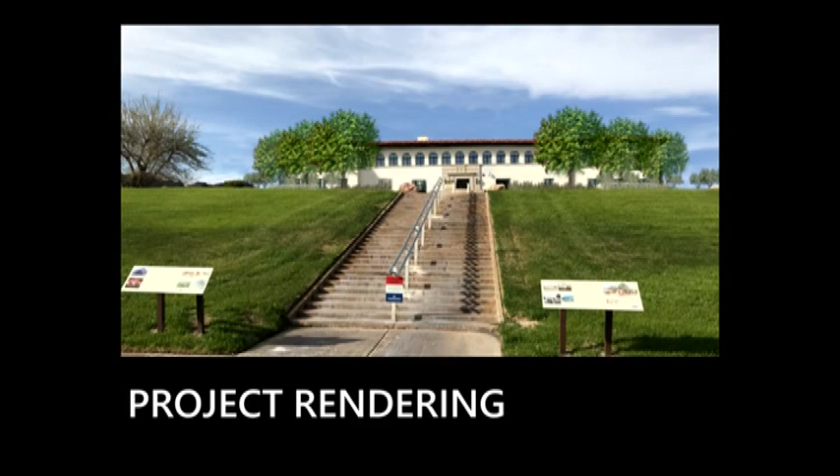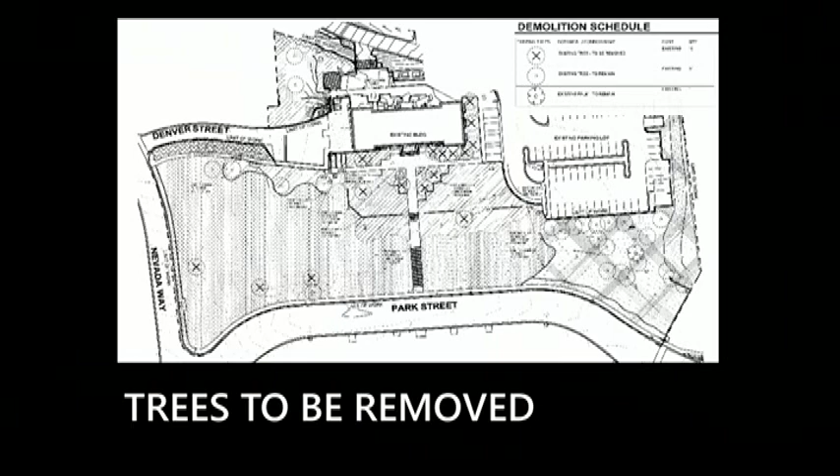Next slide. Here you can see where the new trees will be planted. Like we mentioned earlier, the pistache trees will be planted near the main entrance. Shade-producing Chinese elm trees will be planted along Nevada Way, between the existing mulberry trees along Denver Street, along that service entrance there. And laurel trees will be planted next to the building.

This project also, on the street, I want to point out that we will reset the Reclamation sign at the corner of Nevada Way and Park Street and plant some flowering plants such as gold lantana, red yucca, and some indigo bush.

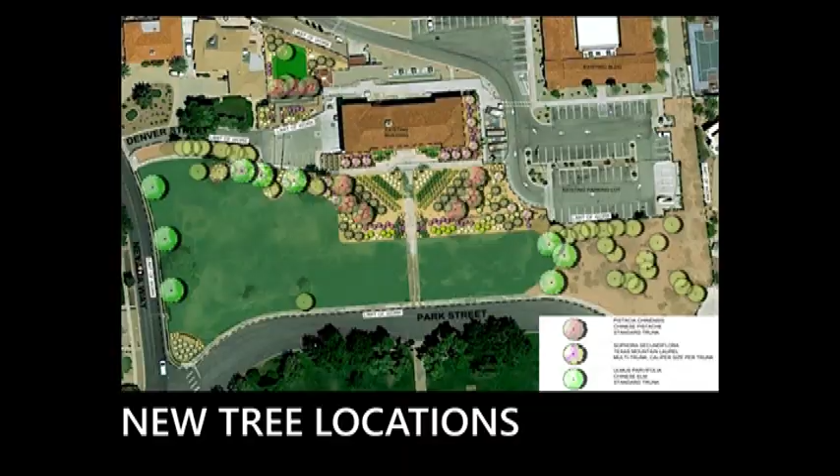Next slide, please. Here is a plan of the new irrigation system. The irrigation system has been professionally designed to be water efficient, relatively low maintenance, and able to supply water to the lawn, trees, shrubs, and flowers.

Labor and water saving features include automated control valves, timers, and moisture sensors. With proper maintenance, we expect the system to last approximately 30 years. We will also be connecting into the same raw water supply Boulder City uses to water the park across the street.

And because Park Street is a no-cut street, the pavement patch is over 100 feet in length. So in the pop out of that exhibit gives you an idea of the patch that we'll be placing. Next slide, please.

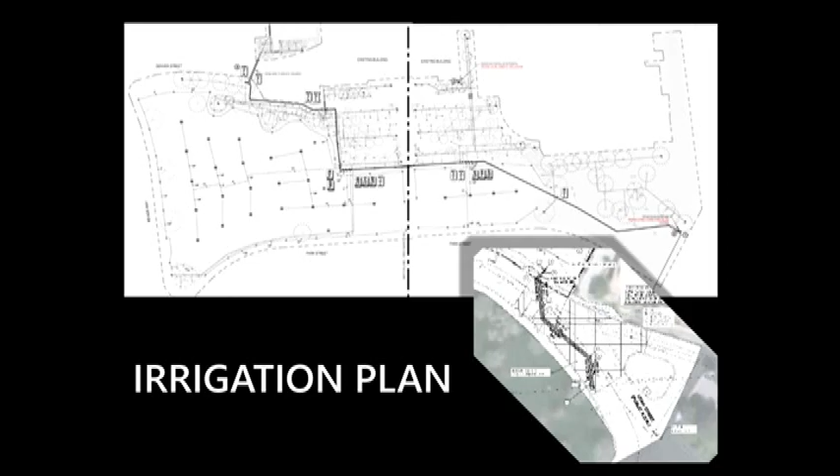So the next series of slides will be talking about the existing accessible route and some of the options. So the accessible route shown in red requires a person to drive to the site, park in one of the accessible spaces, and then enter the rear of the building.

Please note that the park side entrance, or the south of the building, has stairs and is not handicap accessible. And furthermore, the site access road is very steep and not an option for an on-site accessible route.

And the sidewalk along Nevada Way ends at the site entrance road to the north and terminates at the sidewalk along Park Street and Nevada Way. In other words, there currently is no sidewalk adjacent to the site from Park Street or Nevada Way. And so in summary, the site as it sits today does not provide inclusive access to the public right-of-way.

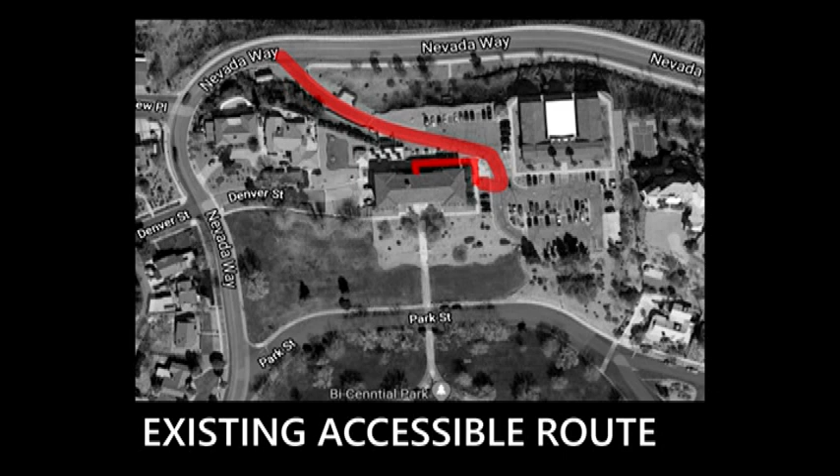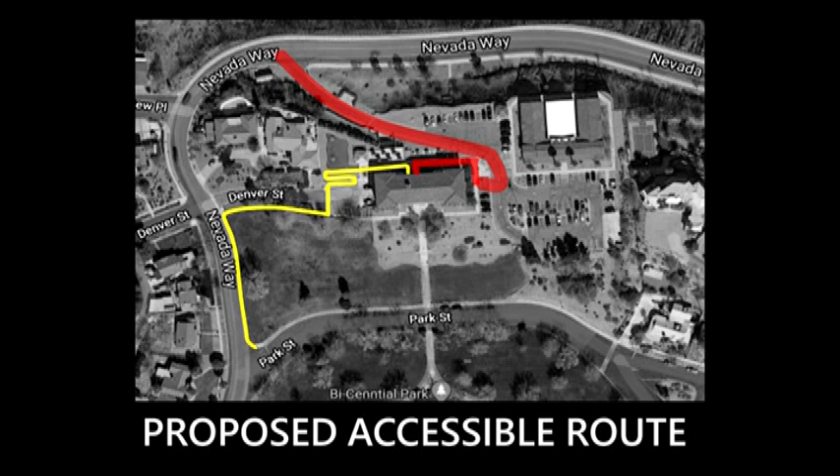The project is considering an access route that will construct a new 5-foot sidewalk along Nevada Way from Park Street to Denver Street and construct a concrete ramp that switchbacks up to the backside entrance of the building. Next slide, please.

This is what the proposed ramp that switchbacks up to the back of the building would look like. From a technical and user's perspective, this part of the accessible route is not ideal because, one, it would lead you across the service entrance to the back of the building and not to the park side entrance. And whether the building is historic or not, this kind of approach can be perceived as not being very considerate and inclusive, especially for a working government building.

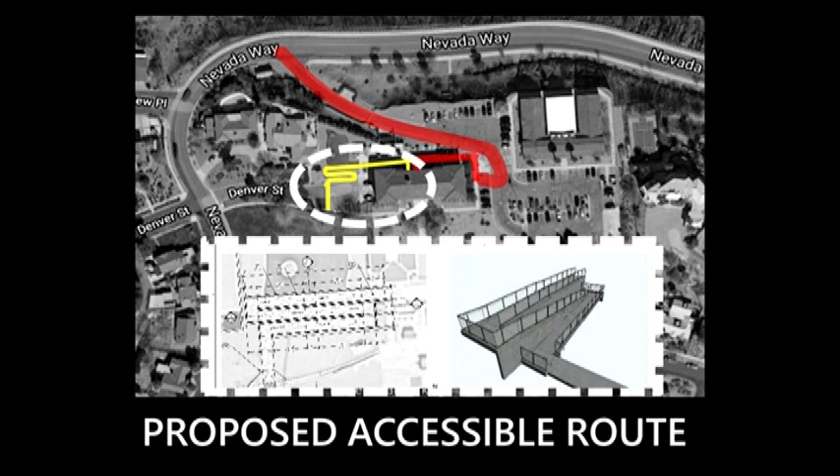In other words, it gets people to the main entrance. It also helps keep the public out of the service entrance area and the employees' break area. It is more compliant with accessibility standards and objectives. It's also a shorter route, more shaded, would cost less, and in my opinion, would look nicer. And from a building security perspective, it might be a better option as well.

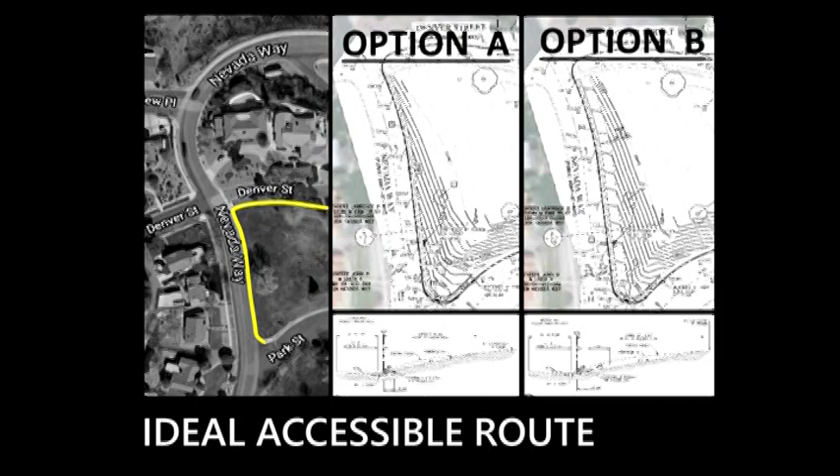So then, yeah, sorry, that leads into my next question. I guess I'm confused—maybe you can explain, when it comes to accessibility to a building, I'm used to making sure accessibility is not just to the building, but from perhaps parking. And I'm wondering why the sidewalk is being added to the building starting at Park Street. Are you expecting people to park on Park Street, or is this like an alternative accessible route in addition to the red route in the back?

So this would be an additional route then. The red route that's shown, that complies with the Architectural Barriers Act, and that is an accessible route.

For a historic building, you're allowed to have the access be where you can drive up, park in an accessible space, and then have a pathway to an entrance of the building. The yellow line is a secondary route—it's more consistent with the principles and intent of accessibility, especially universal design principles, where you're providing access.

So let's say, for example, there was an employee using a bus and public transportation—this would provide them access to the building. Without that access route to a public street, what we do now is provide some reasonable accommodations. So the yellow route is just a better, more inclusive, accessible route.

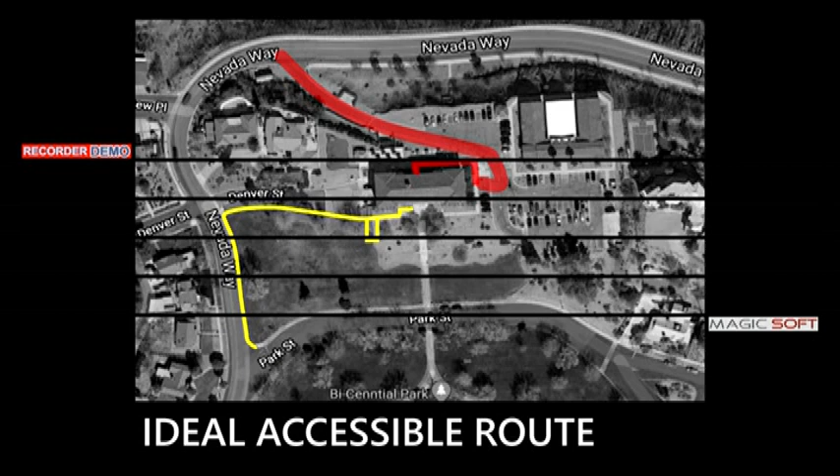So yeah, I would agree that it would be worthwhile to engage the city and talk in more detail about some of these larger accessibility issues. I agree.

Thank you. You guys have done a lot of really good work. Thank you.

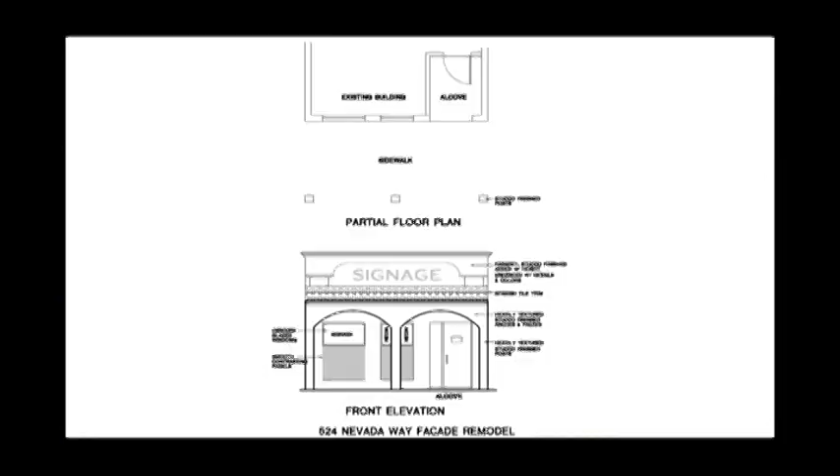And that was the entire reason for buying the building and creating a tavern, because of its shape. We've always referred to it — I've had the dream for years and years to create a skinny bar. There's something about a long, narrow tavern.

It forces, by its nature, I think, a little bit of intimacy, a little bit of exclusivity. And I think it's going to be a great venue for live music as well. We're really excited to be bringing in some talent. And because it's so skinny, every inch matters, so we are taking great care on the design.

In other sites, the die wall for the bar could be a 2x6 wall. We don't have that luxury here, so it's going to be like maybe a 1 inch by 2 inch metal tubing. So things like that are going to be a design challenge. It's probably going to be more expensive, but every single inch matters. We're really looking forward to the challenge.